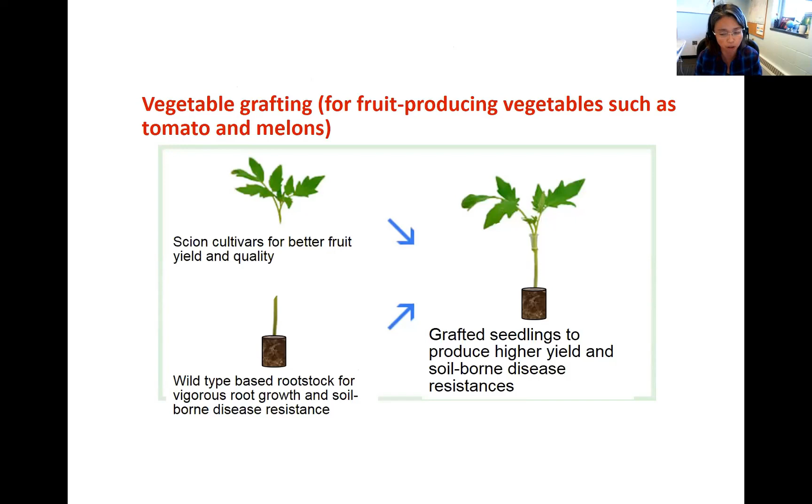So a group of scientists in universities, right now 10 universities, or actually not just universities, including USDA research centers, got together. So a total of nearly 40 people are working on this, introducing vegetable grafting technologies in the US to support the US fruiting vegetable industry. This whole big group is led by Dr. Frank Louws. I don't think he can make it today, but he will be giving a presentation. He's a plant pathologist at NC State, North Carolina State University, taking the leadership of this large group, working together to develop this new industry and usage of grafted plants.

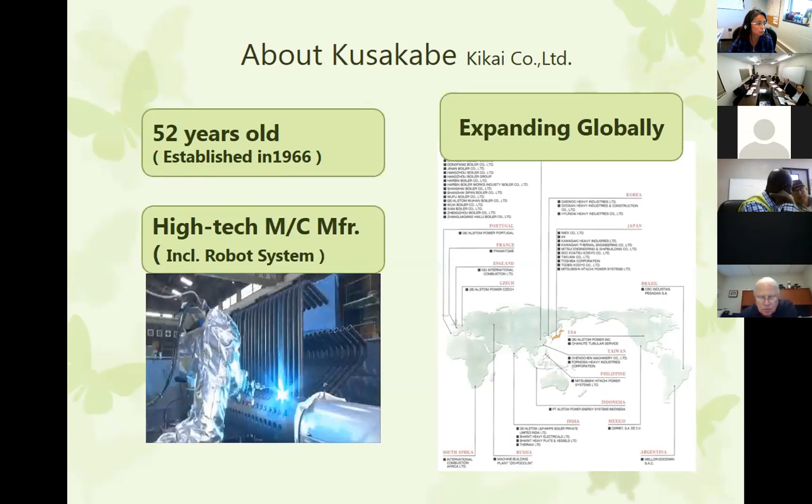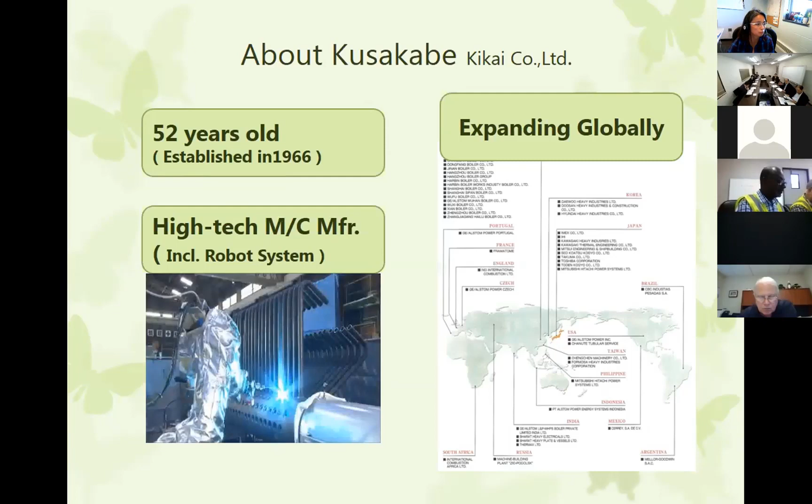As you see the map on the right side, we have exported lots of special machines to overseas customers. Based on the expertise and the know-how accumulated in the past, we developed a grafting machine. Next slide, we will introduce you our grafting machine lineup.

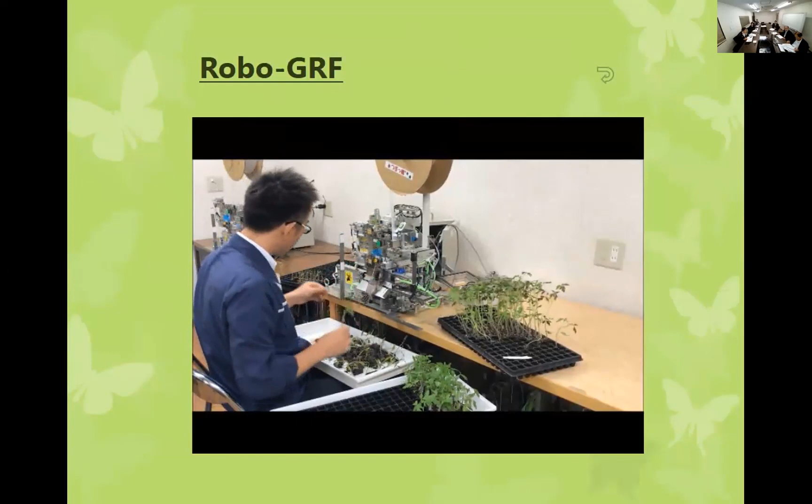RoboGRF. This video shows you the takt time. Next one. This is the structure of the RoboGRF. Let's look at the video of RoboGRF. Okay.

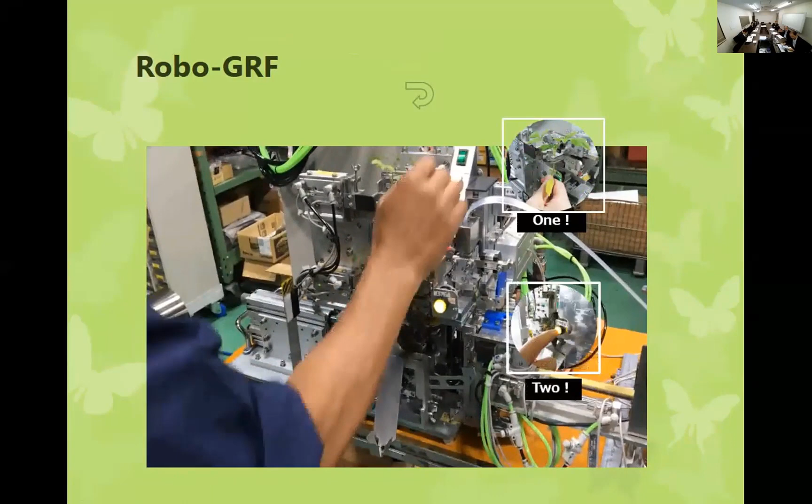Good. We will explain about the operation and the machine movement step by step. One, two, and finish. First, set the rootstock and the scion, and then push the first button. And you see the seedling will be held by the machine hand. Push the second button, and the rootstock and the scion will be cut and grafted.

And a clip will be set on. And the finished product will be output. Once the second button is pushed, automatic movement starts and automatically ends.

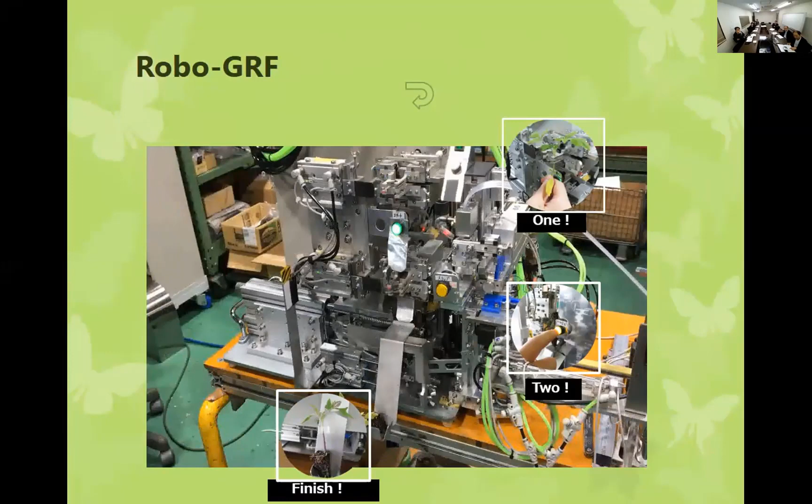First, insert seedling. RoboGRF is much improved in four major concern issues which were observed in past machines. The first one is how to stabilize grafting quality. Mechanically controlled, RoboGRF provides you stable rooting efficiency, which is more than 95% based on the results at the customer site in Japan.

The second one is high productivity. RoboGRF provides you 3,000 pieces capability per day per person. Let's watch the video.

I have a quick question though.

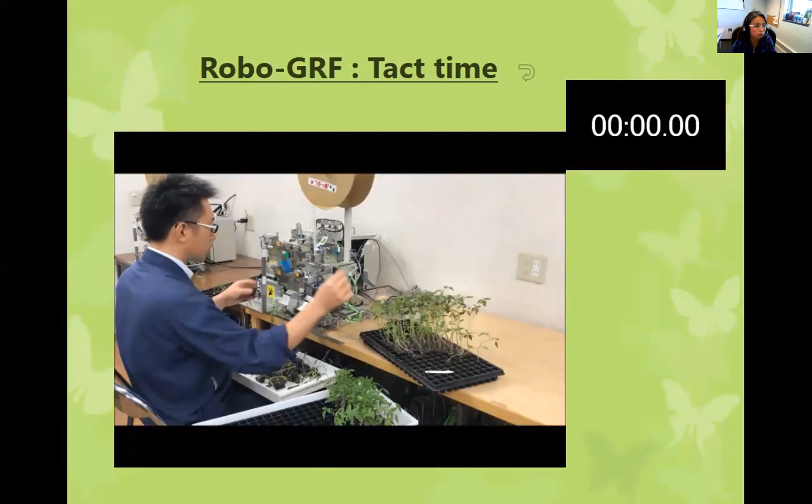So I have a question. The previous slide. Okay, never mind. Just go ahead.

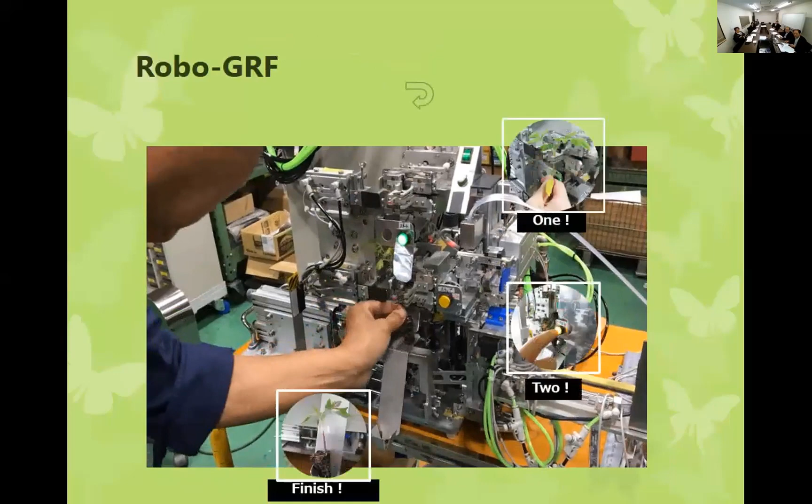Yes, I have a question here. What is the rooting efficiency? Is that the success rate? Yeah, success rate, yeah. Success for the graft. Success rate in Japanese. Okay, thank you.

High productivity. The second one is high productivity. RoboGRF provides you 3,000 pieces capability per day per person. The takt time is 8 seconds per grafting, which means 450 pieces per hour. 7.9 seconds. Yes, the takt time is 7.9 seconds, nearly 8 seconds.

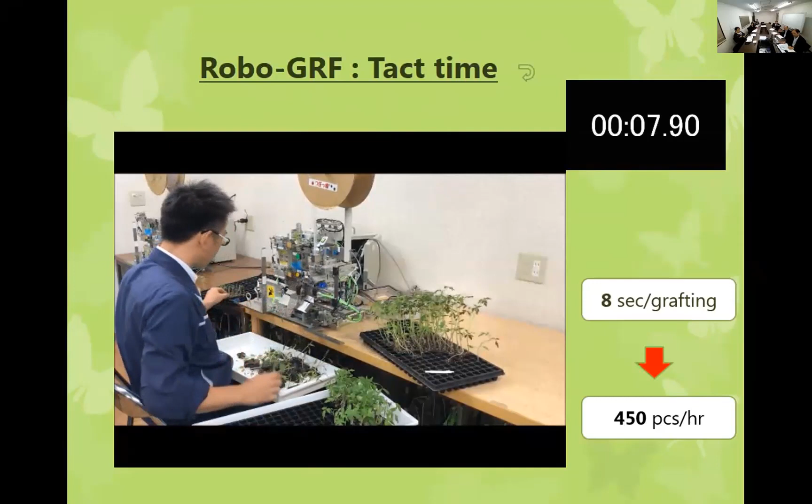Based on this takt time, one day output is 400... one day is 450 pieces. One day was more than 3,000. Sorry, I made a mistake. Yeah, 8 seconds per grafting means 450 in one hour. So one day, more than 3,000. Sorry.

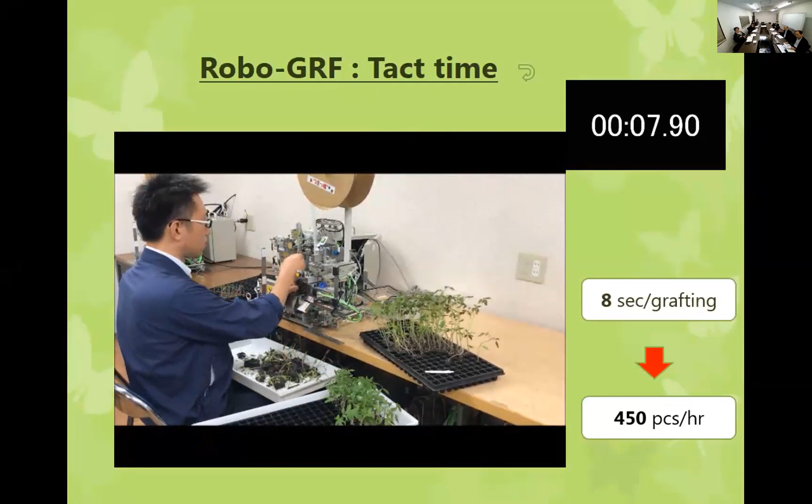Yeah, cost performance. We continue. As for our RoboGRF, the price is very reasonable, which is less than half in price in comparison with other manufacturers. Very cost effective.

And RoboGRF does not require any qualification or any specific skill for grafting, while manual grafting requires both, along with training by veteran trainers. So anyone can master grafting with RoboGRF in just one day.

If you are involved in the agricultural business, you may be reluctant to adopt high-tech agricultural machinery because you are always concerned about the maintenance. However, please be assured that this issue can be easily solved by replacement machine delivery. That's what we actually do in the Japanese market.

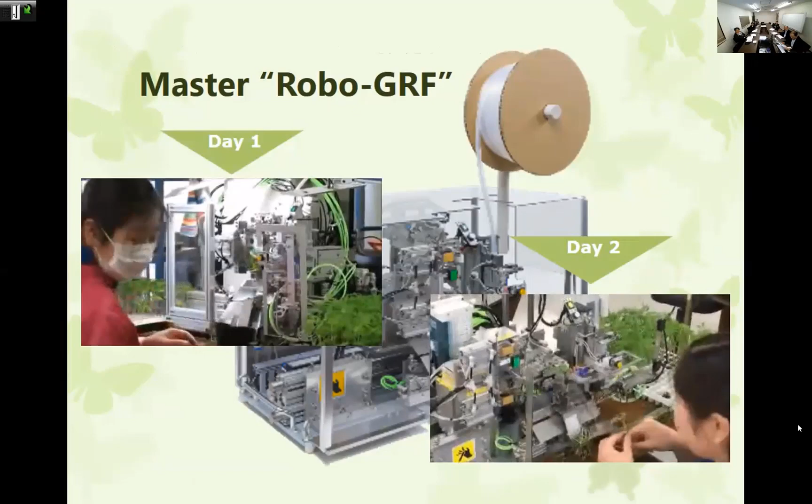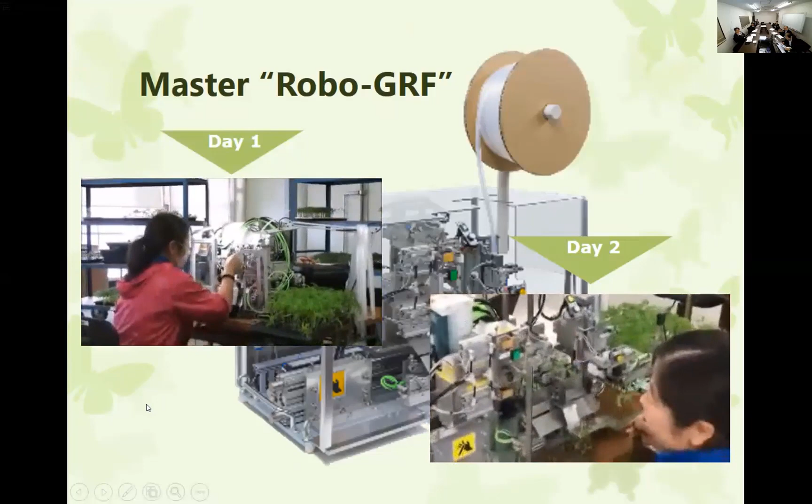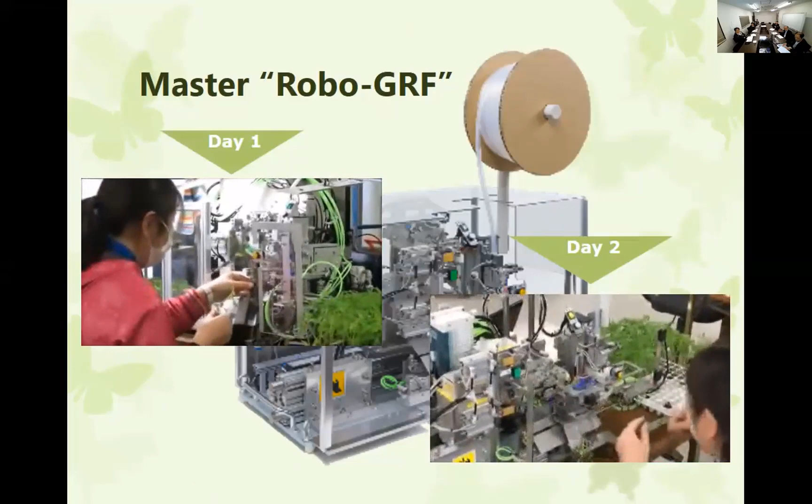Yeah, this is mastering RoboGRF. As I explained in the previous slide, please watch the video, which shows you how she came to master grafting with RoboGRF. On day one, she met RoboGRF for the first time, you see. She's a little bit timid and nervous with RoboGRF. Day two, you see, she's operating RoboGRF smoothly and confidently because she already mastered how to operate it in just one day. Same person, different day.

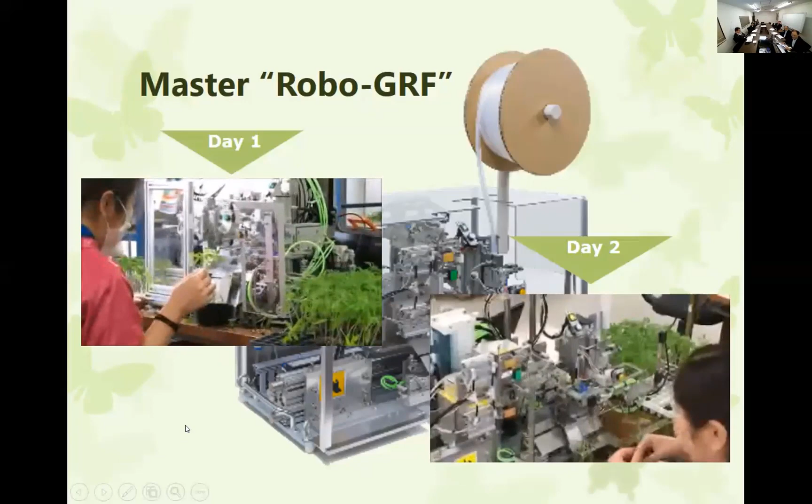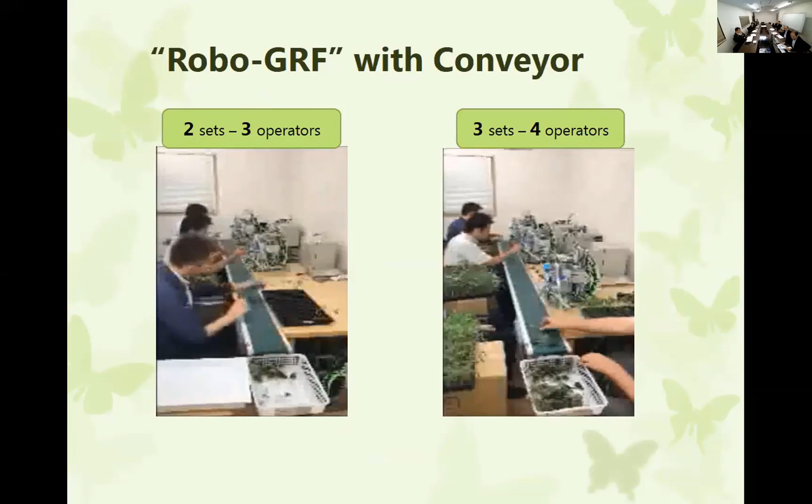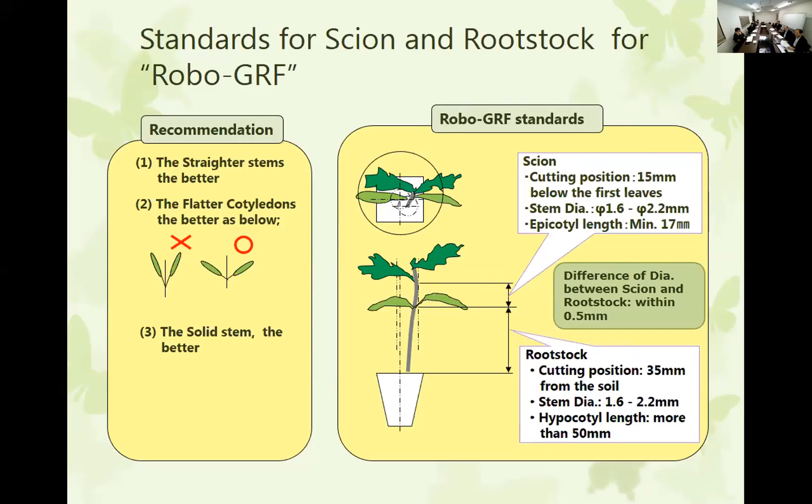Conclusion. At the last, Robo-GRF is the lightest, the most compact, and the easiest machine to operate in the world. Anybody can start right now. Easy grafting with stable quality and high output with Robo-GRF. Thank you for listening.

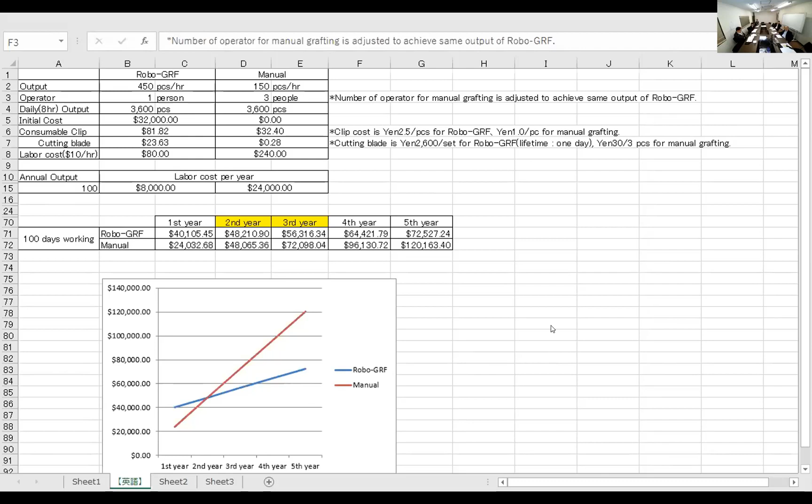So here's another question. During commercial operation, how many plants can be grafted before you have to replace cutting blades?

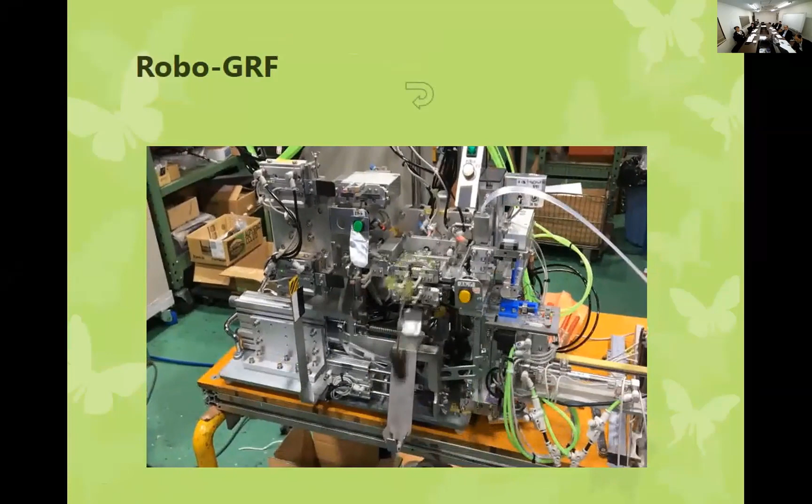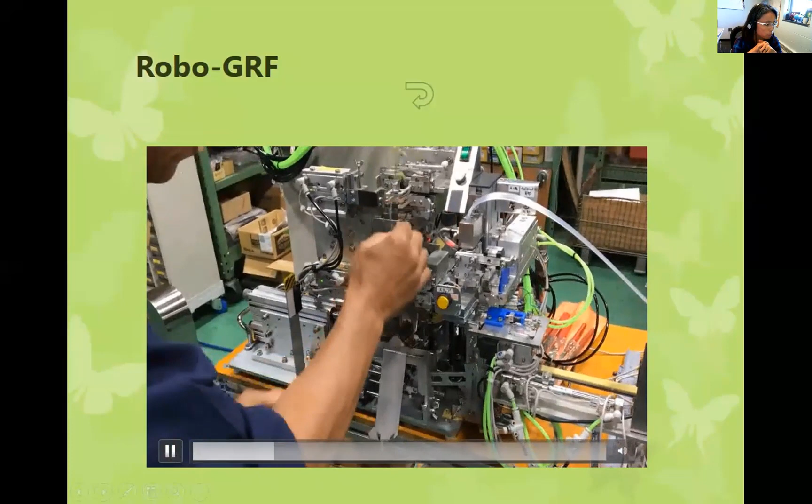Okay, so the first one is rootstock and then scion, and then push the button, and it does the rest. Questions regarding this? Anyone? I have a question.

If we're interested in potentially purchasing a robot system for our campus for academic research, is it possible to come visit and test out the robot with our research genotypes, or just see how it performs before investing in a purchase?

That's possible, a demonstration on your campus. Okay, so they could bring the robot to campus.

The total weight of this system is 45 kilos, about 90 pounds. So relatively easy to carry around compared to other machines. Maybe too heavy for one person, but possible with two people.

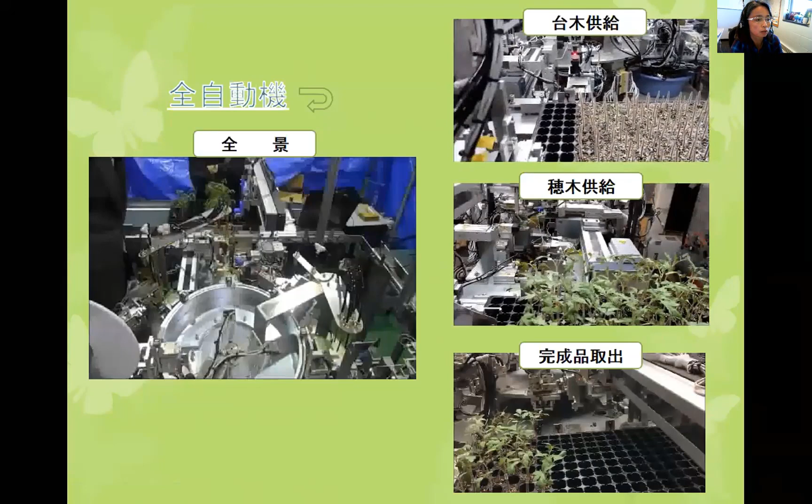So I think what we are seeing is the automatic or full automation model they developed earlier. What's the speed of this grafting? 800 grafts per hour. Okay. And are you selling this too?